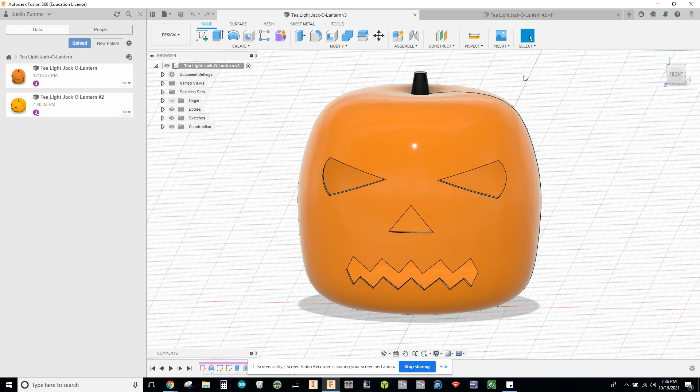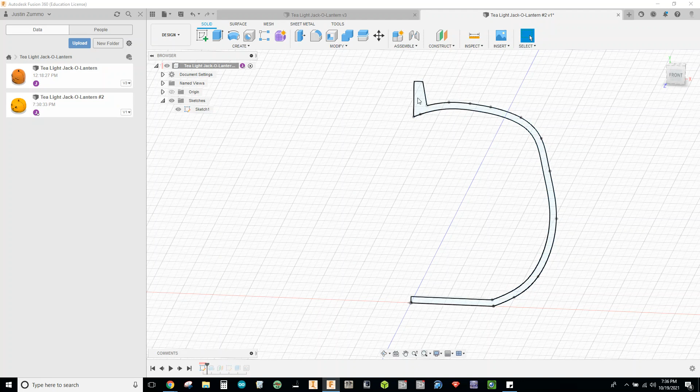So in order to get started, I wanted to review a couple different things about how we go about making this design. If I take this all the way back to the beginning, when we get started, I just make a sketch, and that sketch is the outside core of what is going to make up the shape for our jack-o'-lantern, for the pumpkin. Notice that the stem is incorporated into that as well.

I have a spline here that creates a really nice organic flow around the outside contour of the shape. Down here we have a flat portion, which will help us get a good print base when we send this to the 3D printer, and also provide a base for us to sit on top of the tea light. Eventually, towards the end, you'll see we make a hole in the bottom for the light to fit through. So this is the form, the shape, the sketch that we then revolve.

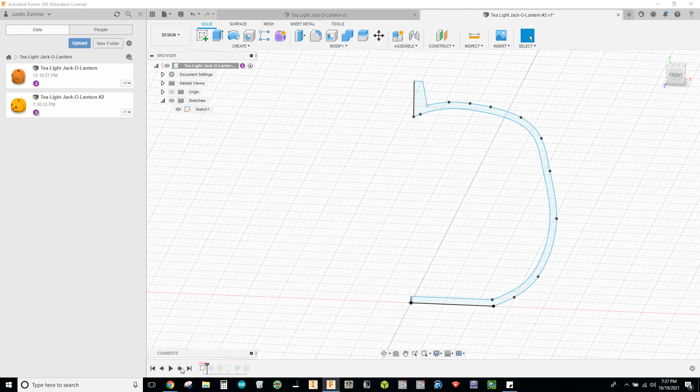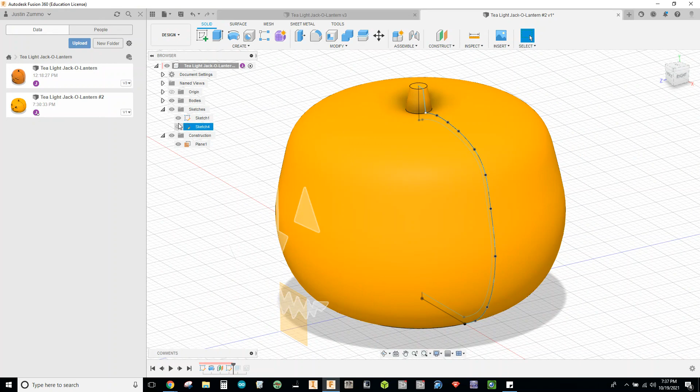So the next step was to revolve that 360 degrees to create our hollowed out shape. Next, I made a plane out in front of that area. If I rotate the pumpkin here, you can see I created a plane out in front. On that plane, I created another sketch, and that sketch incorporated the facial features.

I tried messing around with text and got a few different weird errors. With text, it's tricky too because you're not able to support some of the different cutouts, like for the letter D and B, unless you use a stencilized font. But for this jack-o'-lantern project, I'd advise going with some type of facial feature and staying away from the text options within sketch mode.

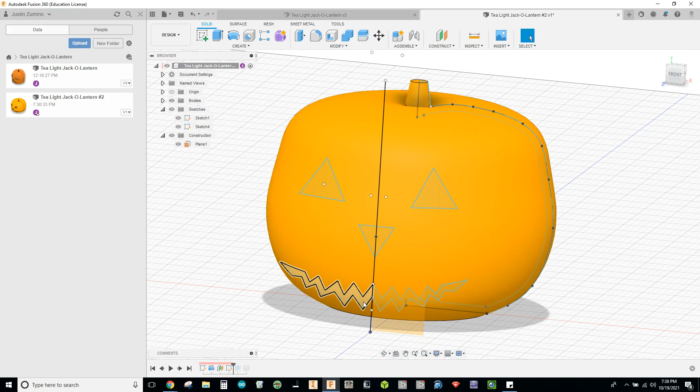Either way, here I made my facial features with the polygon tool and made a triangular eyeball, a nose, and using the line tool and arc tool, made the shape you see down here for the mouth. And then I have this line right down the center. If I square up on the front of the cube, I have this line down the center, and I actually mirrored over my left eye to the right, and the left side of the mouth to the right. The triangle I ended up placing on center with the line, so I just had that one from the get-go.

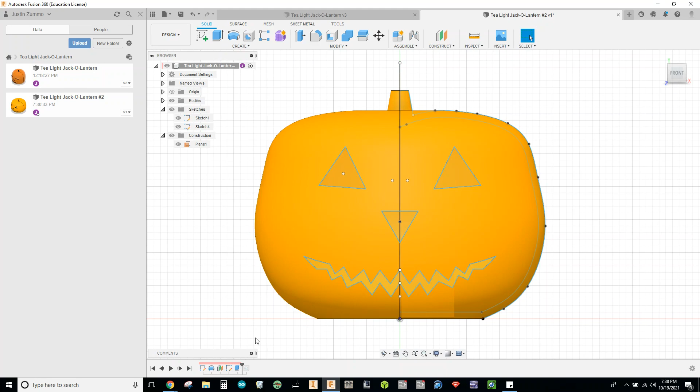After creating that sketch, I went ahead and extrude cut that backwards into the form, into the revolved hollowed out part, and you can see now how we have a very nice shell going on inside. After that, the last step was to use the hole feature that you see up here on the menu bar.

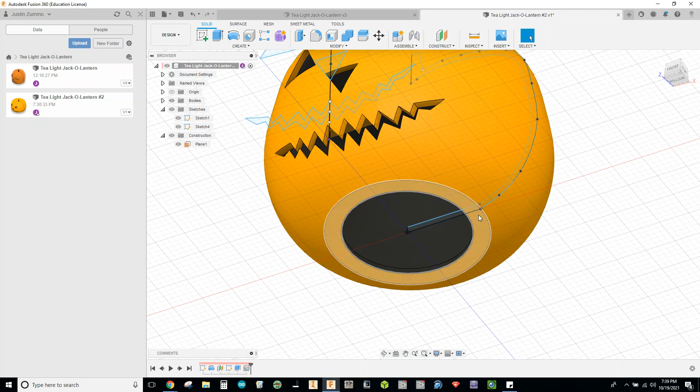The hole feature, if I rotate towards the bottom here, gave us a real nice cleared out opening. Again, we have this base here that'll help get nice adhesion to the print bed when we send this over to the 3D printer, and then a gap inside for the light to sit in and glow nicely through whatever face you put on the front of it.

So let me go ahead and start from the beginning. To get started, I'm going to go up here and select File and click New Design.

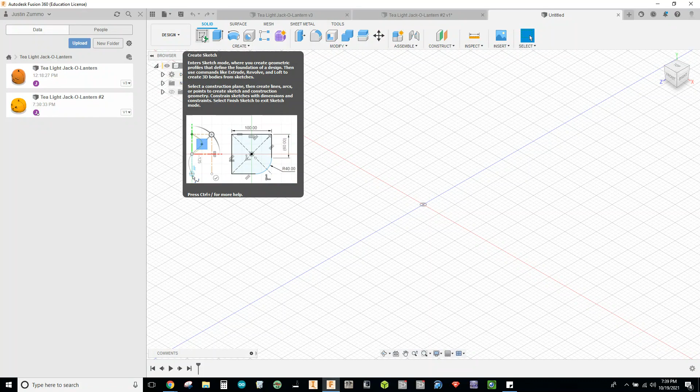First thing, I'm going to create a sketch on this back surface. For this sketch, there are only two dimensions I really want to make sure you all have be very specific: it's going to be this base dimension and the height dimension here.

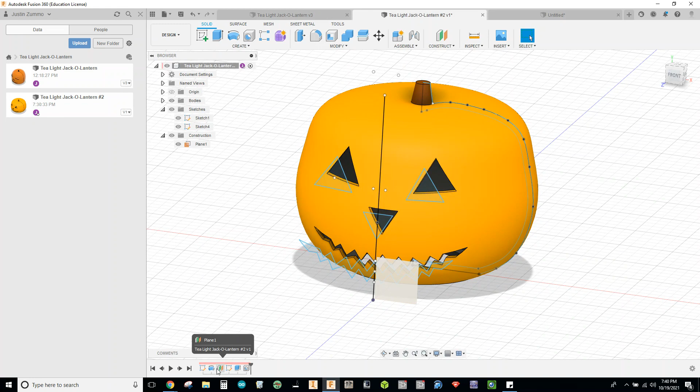If I click back over to my example I was showing you, sketch number 1, you can see the overall height we want to shoot for is around 1.5 inches. This base width is going to be 0.625. Another dimension worth noting here was the offset, which came in at 0.05.

And then the stem was really just drawn in organically, so no specific dimensions for the stem.

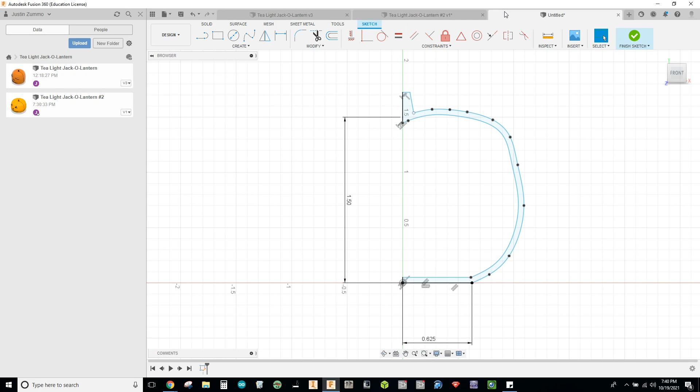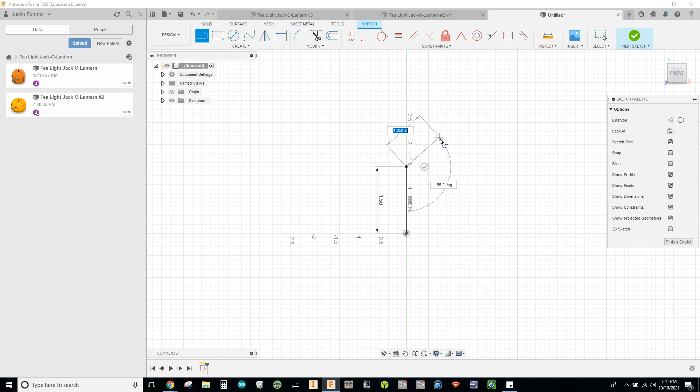Let's head back over, and I'm going to get the line tool. Always use the origin when beginning to construct a part. Click on the origin, go straight up from there, get the alignment going, and then type on the keyboard 1.5 inches. If I just click on my mouse to specify the next point, it'll allow me to keep drawing. But in fact, I'm actually going to go to the bottom and start again.

So I hit escape on my keyboard, grab the line tool, go back to the origin, click, drag out to the right this time, and type that number 0.625.

At this point, I'm just going to zoom in and grab this dimension tool, or the dimension itself, and drag it down out of the way.

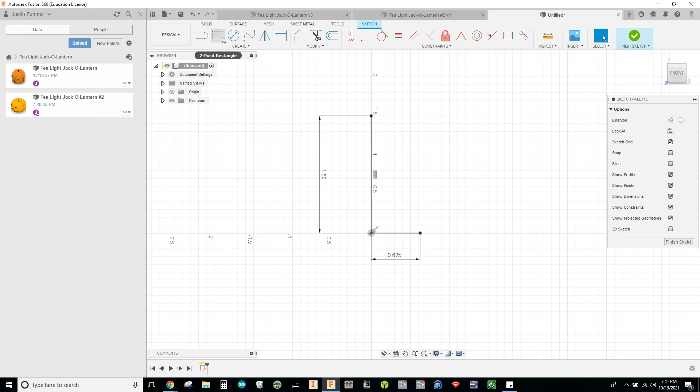Next, I'm going to grab my spline feature, and starting up here at the top, just gradually click and curve a really nice organic looking line. It's okay if you don't get it at first, but basically connect down to the bottom here, hit the green check mark to finish.

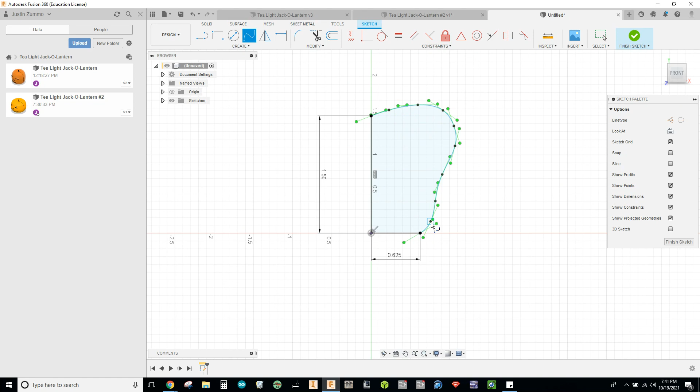And as I was saying, it's okay if you don't get it at first, because now we have the option to drag on these points and move them around and further finesse them into position. So feel free to have some fun with this and get really funky and bumpy if you need to, or if you like to.

Ultimately, I'm just going to go for a really nice curved outside shape. Something like this should be fine.

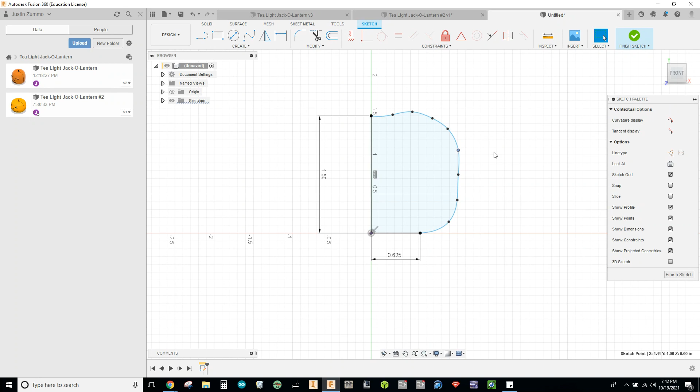Before we move on here, what I would like to do is an offset. Select this entire profile and give it a value of 0.05. That's going to give us a very nice hollowed out space inside of the jack-o'-lantern so that the light can glow, and also reduce the amount of plastic that we need to use to build our final product. So 0.05 for the offset.

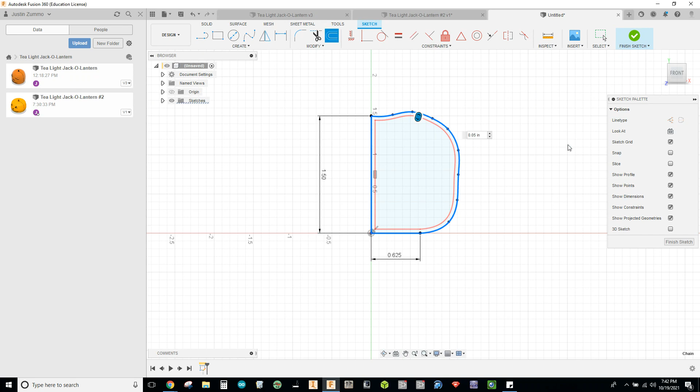Then I'm going to grab my line tool, and up here at the top, just clicking on this top point and extending it up another 0.2, 0.1, 0.3, it doesn't really matter. Kind of just fit this in as you see fit. Drag out to the side here, and then connect it back down to the shape, to the curvature, to that spline that we have going on.

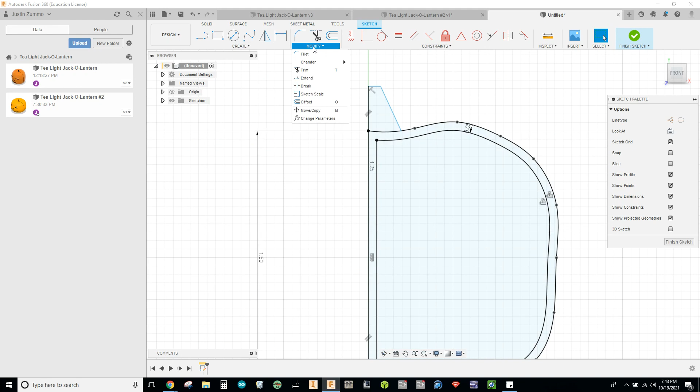To finish this off, we just have to clean this up a little bit. And what we want to do is grab our extend tool. I'm going to highlight this line and extend it out towards this center point, center line. Down at the bottom, do the same thing, extend this out to the left.

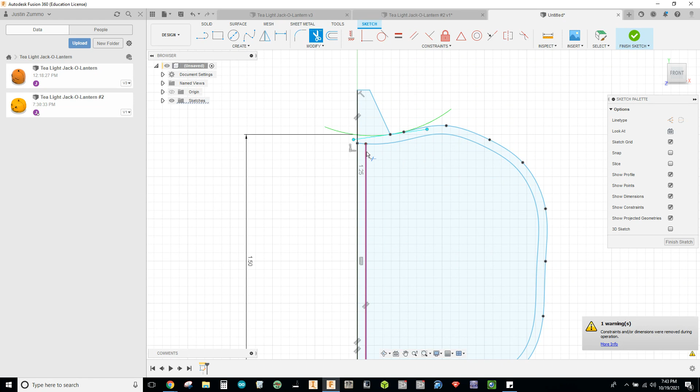Now I'm going to go back and use my trim tool here, and I want to cut out all of the interior portions of the line that I don't need anymore. So there, with 1, 2, 3 clicks, got rid of all my overlapping lines that I don't want. And I'm just left with one continuous path that will create the sketch for the revolution that we'll do next. So finish sketch from here.

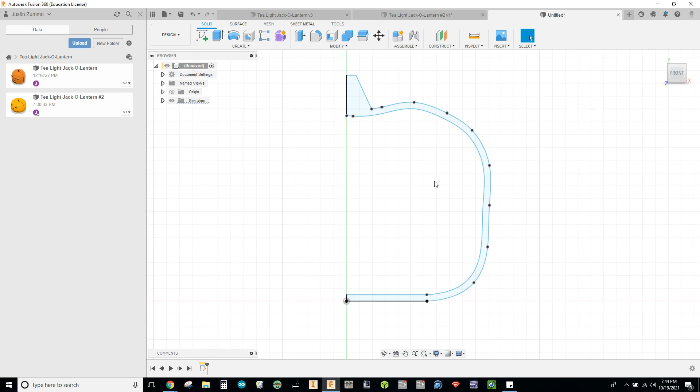Next, I'm going to go to revolve. It pre-selected it for me because it's the only sketch available right now. Later on, when you have multiple sketches, you will have to select it first. Then the next option is to select the axis in which you want to revolve around, so I'm just going to grab up here by the stem, this center line.

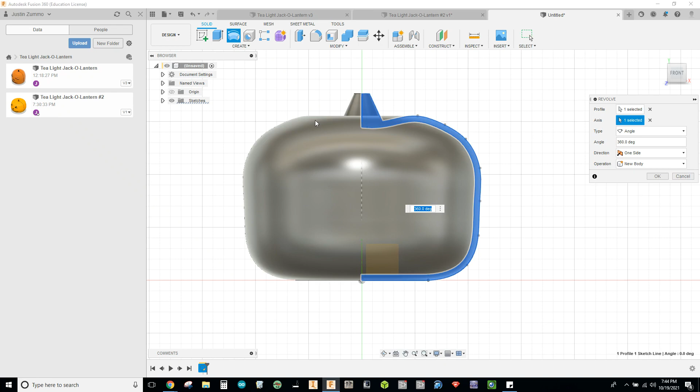You can see after selecting that, it goes ahead and creates the form for me. Just going to create an angled view here. And what's kind of neat is you can grab this node and drag it around and actually see what your part would look like at each one of these angled intervals.

And of course, what we want to do is go for a 360 full enclosure. Over here in options, you can see the angle value again, angle type, you can say degree or full. Direction: one-sided, two-sided, symmetrical. You can play with the values and how much you want to rotate it in each direction. You also have a couple of choices here: join, cut, intersect, new body, and new component. With this being the first solid model in the file, the default is new body.

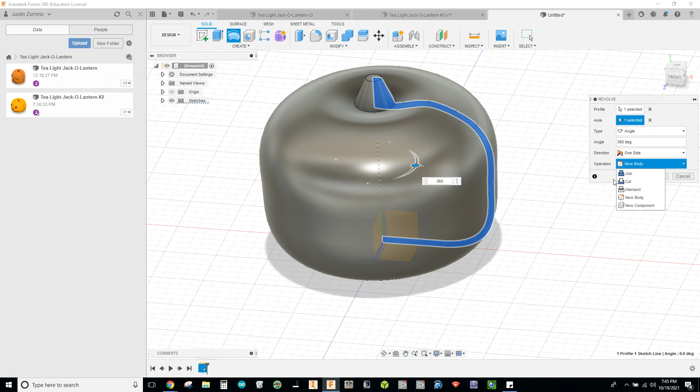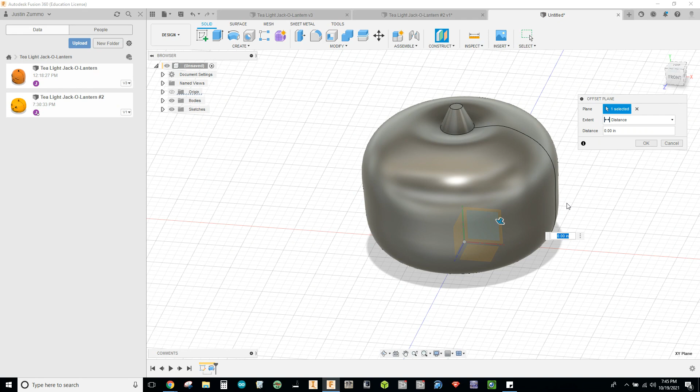Next, I want to create a plane out in front of one of our origin planes. I'm going to go to construct and select offset plane. Here you can see the 3 origin planes are highlighted. I'm going to select that back one, the same one we made our sketch on initially, and give it a distance of 1.25 inches away, just to get it out in front of the shape.

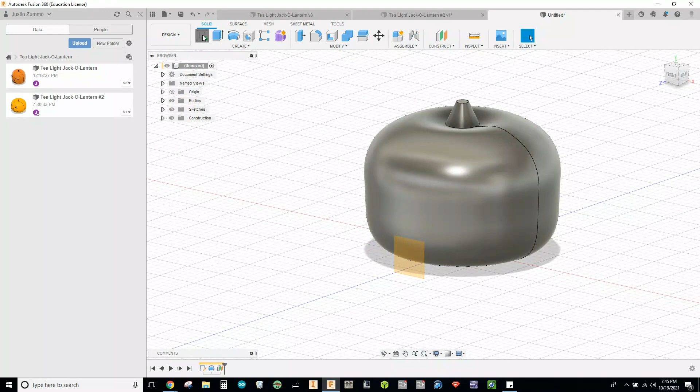If your curvature of your sketch ended up coming out further than 1.25, it's okay, just get the sketch plane out in front. Say okay, then create a sketch on that new plane. Here's where we're going to make our facial features.

I do like to use the mirror tool to get a nice symmetrical look. So I'm going to grab the line tool, click on the origin, and drag this up through the part - that's going to be my mirror line later on when I'm done with my sketch. Then you can play around with the line tool, rectangle, circle.

If you hold down create, you'll see arc, polygon - you can use this to make triangles. I'll show you that. Doesn't matter which one of these you use. I'm just going to grab the first one and click anywhere to get a decent position going.

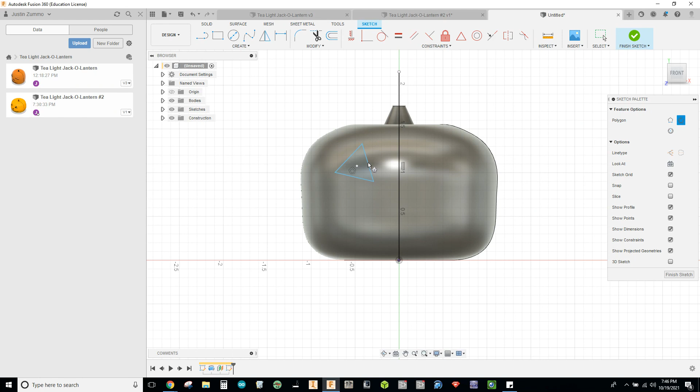As I drag out, you can enter in a dimension. If I hit tab on my keyboard, I can move over to specify how many sides I want within this polygon. So I'm going to give it 3 and just click randomly to create the shape that I want.

I'll do the same thing here with the polygon tool for a nose. I like a nice triangle nose on my jack-o'-lantern. I'm just going to drag up, get on the center line, so that's nice and centered.

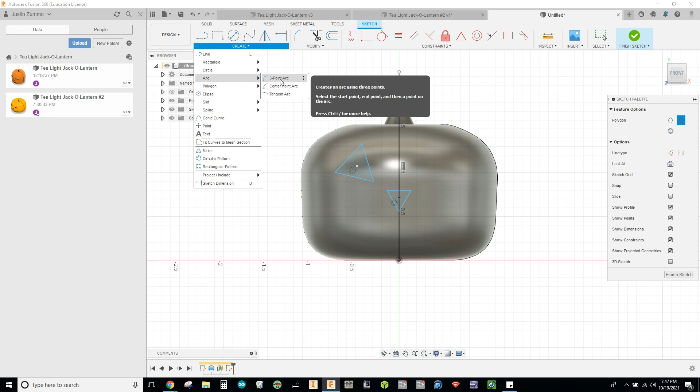To make my face, one option you can use is to start with an arc and go with a 3-point arc. You can click anywhere here on this middle line, anywhere out here to the left, and then you have a third click - that's why it's a 3-point arc. 1, 2, 3 points, 3 clicks, and create a curve.

And then do another one down here at the bottom to the center line. If you don't like how it comes in, you can always click and drag on these lines. That's the nice thing with Fusion - it allows for free form modeling, as we saw highlighted in one of the tutorial videos when we got started.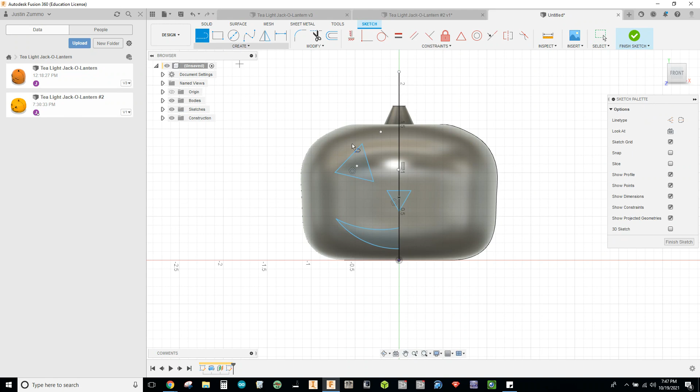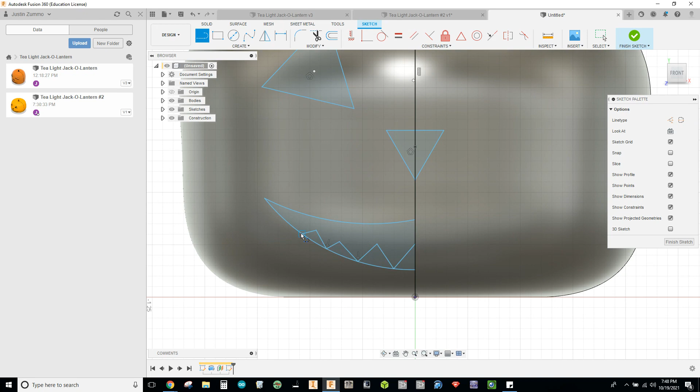From there, I'm going to use the line tool again and draw in some jagged looking teeth. I'll click anywhere here along my bottom curve, meet it here in the middle, and continue that kind of randomly all the way up the curve. Let's see how many I can fit in here.

And then just repeat that process here on the top. Again, there's no wrong way to do this type of work. There's no wrong way to carve a pumpkin either. So have fun with it as you go.

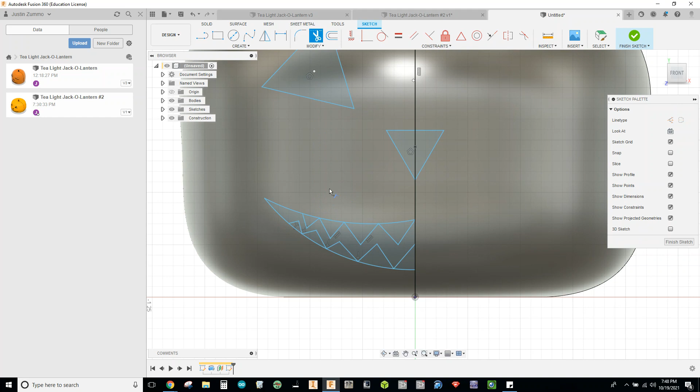Okay, and then what I'm going to do before I move on is just trim out the overlapping lines here, because all I really need here is that jagged pattern to cut into the face to create the mouth.

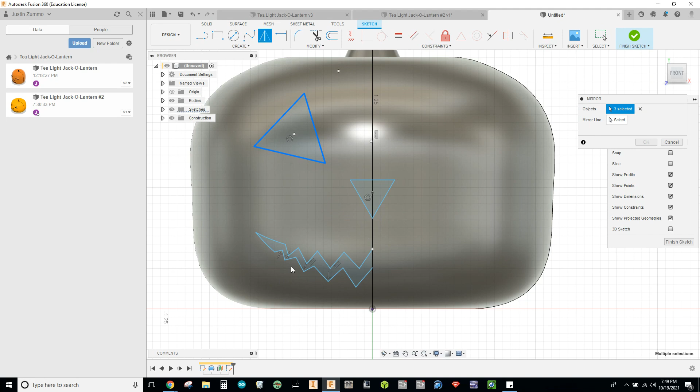And next, I'm going ahead and mirror. When I click on the mirror option, you can select different lines to add one at a time, or you can click and drag and select multiple lines at once. I ended up having 42 lines selected out of all that.

And then next, I just have to select my mirror line, the one we put on here first. You say okay, and you can see it flips over to the other side perfectly, all done for us, nice and symmetrical. Finish the sketch.

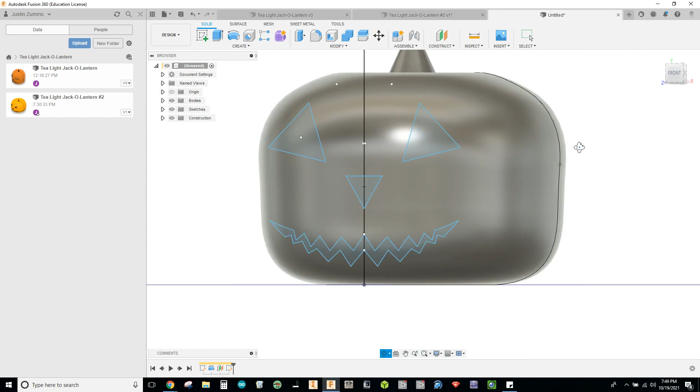Next, I'm going to extrude this in through the part. Select all of these enclosed shapes. And then for this, normally I would know a specific value that I wanted to use, but we're kind of making an organic shape and feature here, carving jack-o'-lanterns, same business.

So if I just grab this arrow, I can drag it in. You can actually see as it cuts into the part how it's going to make an impact. So if you want, you could even play it short and just make little cuts in and have big angles to it - that'd be kind of cool.

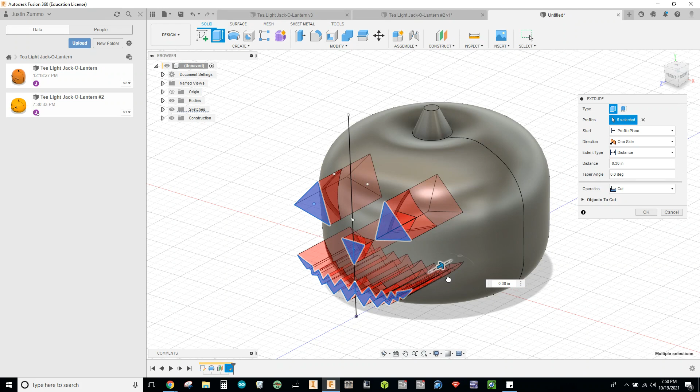Or you can go all the way through. At a certain point, once you reach the midpoint of this, you're not going to be making any more of an impact. I suppose you could blow it out the backside too, which would be interesting, a different way of using it. You know what, I actually haven't done one like that before. So I'm going to blow it all the way through and have that face on both sides. How about it?

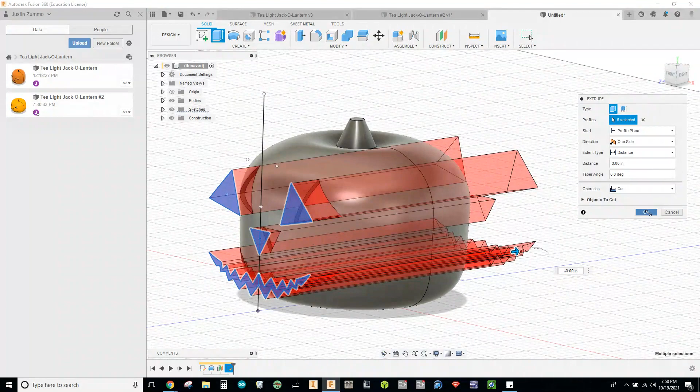Okay, now the last thing to do is add a hole and just have some fun with changing the appearances around.

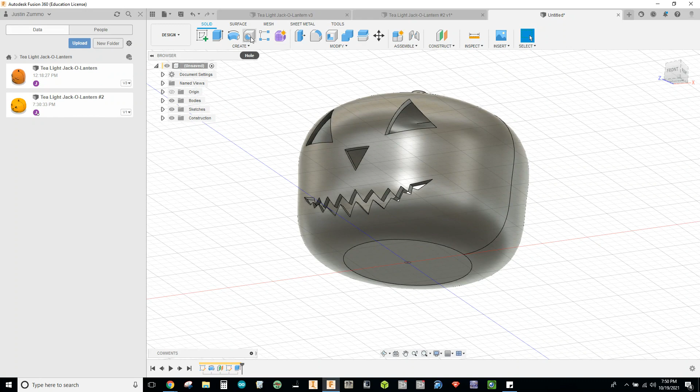I'm going to go ahead and select the hole feature. I could make a sketch, put a circle on it, extrude, and cut that away, but that's kind of the cheap way of going about doing that type of feature. So if you have a special feature for making a hole, why not use it? I have this hole feature here.

I'm just going to rotate towards the bottom and start by selecting the face that I want to make the hole on, which would be this bottom surface. Next, I have to establish the concentric reference.

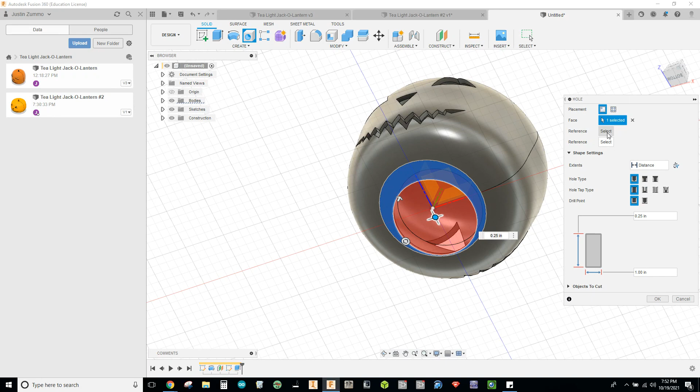Then you can see there's a slew of options here for different hole types: countersink, counter bore, different ways of tapping the hole, adding threads to it. But if you want a flat bottom hole or an angled hole, I'm just going to go simple and flat with this. For the cut distance of the hole, really just need to go through the bottom base of it.

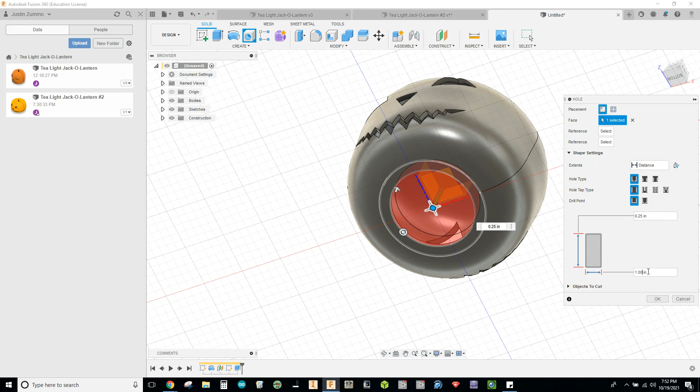A quarter inch will do just that. For the diameter of it, we're going to set it to 1 inch. Say OK. Now you have the hole in the base.

Now we're starting to see how this is looking like a jack-o'-lantern. The light will fit inside of there and glow through our openings. Last thing is to have some fun here with appearances.

If you go to the appearance panel, which I have here on the sidebar, and you type in the color brown or orange, what you're going to notice is I really don't have a nice brown here. What you're seeing is something that I created as my own material because brown wasn't in my library as a default, so I added it as a favorite.

I'll go and show you how to do this next. The only two browns that were in the program were light brown and weathered, which really isn't dark enough for like a stem feature. Just a quick point of reference, if you search orange, there's no orange in here at all. This was one that I had to create and add as well.

So in order to make your own appearances, if there are none—which is just a coincidence, because there's a lot of other colors in the program ready for us to use, and I'll show you a few of them in a second—but orange and brown, the two that we need for this project, are not in there as a default, very odd.

So go down here underneath Modify and select Manage Materials. Then down here, you'll see a little sphere with a plus symbol. That's to create a new material.

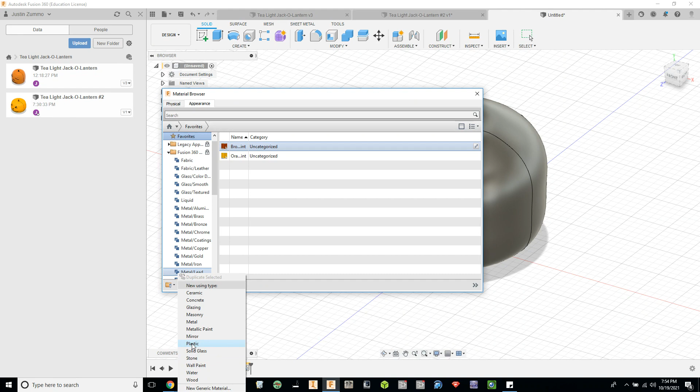There's a bunch of different options here that you can use. I usually just go for plastic or wall paint, just simple finishes and looks. But you can have some fun with all these different options as well. I'm just going to go with plastic because I made a wall paint earlier, and I might as well make a different one. So I'll select plastic this time and just change the name—instead of default plastic, call it orange.

You can select solid, transparent, or vinyl. I'm just going to leave it as solid. Then here for color, you can either do this the old-fashioned way and just kind of randomize the color and get something close to what you think you want.

But you'll notice there are specific values down here as you move this around. These are called the RGB values, and this is something you can look up. These three sets of three digits are specific to every single color that's available. There's also a short code—they call it HTML or a hex code—that you can type in for these specific colors. So for orange, I'll pull up a different tab here real quick.

For orange, if you type in 'orange RGB value'—and of course there are different types of oranges, but if you just go for a standardized approach—this is the three different values you could type in for RGB, or you could just take this code and bring that in down here.

Paste that in. This is the most standardized color for orange. I'll say OK, finish. A couple options for that: polish, glossy, or matte.

Different things here you can play around with, texturizing it, creating patterns in it, and tinting it in different ways. A whole bunch of different options that you can mess with here.

I'm just going to go ahead and say apply and add that as a favorite. Now I will have that across all of the files that I create from here on out, which is a really nice feature. We had something similar in Autodesk Inventor, but it was within the one document or file that you created the color. So essentially, every time you needed that specific material color, you had to create it again within that file. This is nice that it will transcend through all the rest of the files that you create.

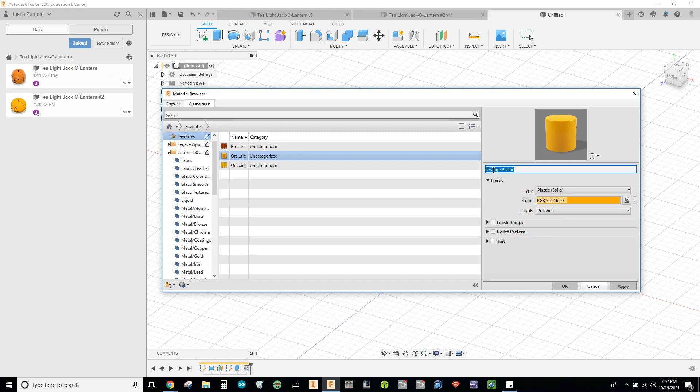Moving on, I'm going to go ahead and create a brown while I'm here. Do brown plastic, change the color over to brown. I have the RGB value here for that and the HTML code or the hex code. I'm going to add this down below. Once you have the color selected, say apply, and we should have two different colors that we can use now on the model.

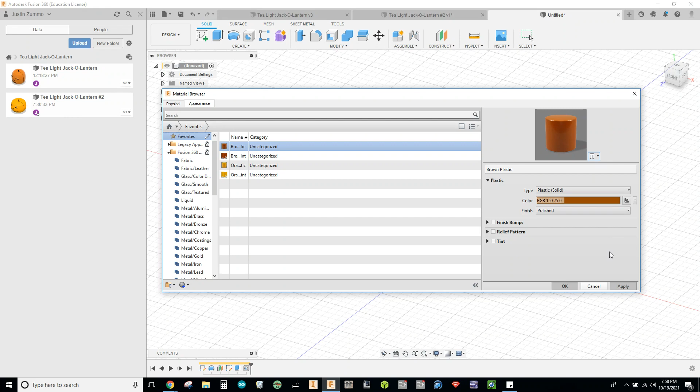So I'm going to close this window, go back to modify here, pull up appearance, and then you can search for it by keyword. You can look through all the different folders that are here within the Fusion 360 Appearances library.

Later on, we can get into adding ones to your appearances here, but for now, I have these favorites that I just created on the other menu, and you can either add them to the design or simply drag them right out here into the space and apply them. There's two different ways to do that.

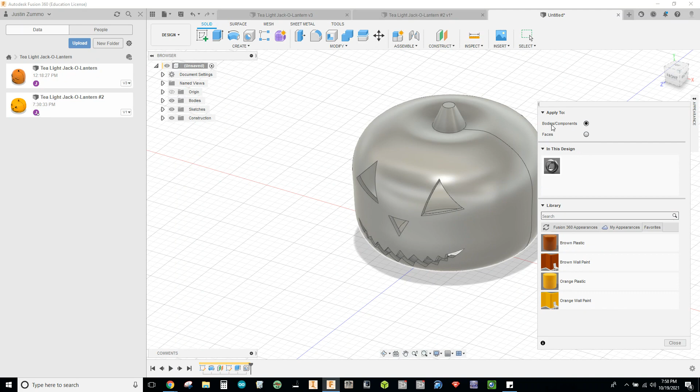You can do the whole body or you can do specific faces. So for the whole body, I would want to grab this orange color and make the whole thing orange, and then switch this over to faces, grab brown, and just do the stem part there and the cap of it. And then I do want to use black because it'll really help this whole thing stand out on screen.

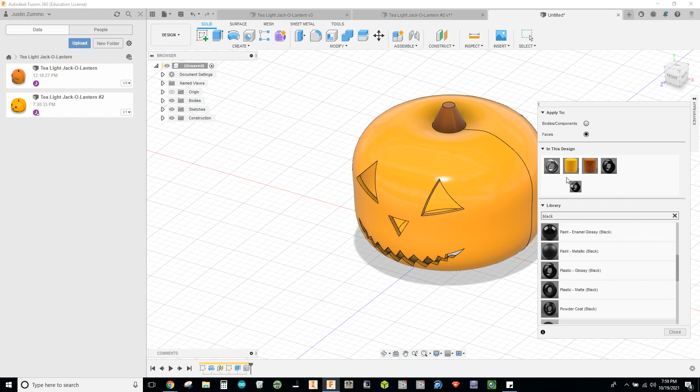So I'm going to search for black, and you'll see there's lots of different black colors in here. There's a nice plastic glossy one that I will add to the design here, and then drag inside the shell. There's a couple other surfaces I can add to that, and it's really going to help it pop on screen.

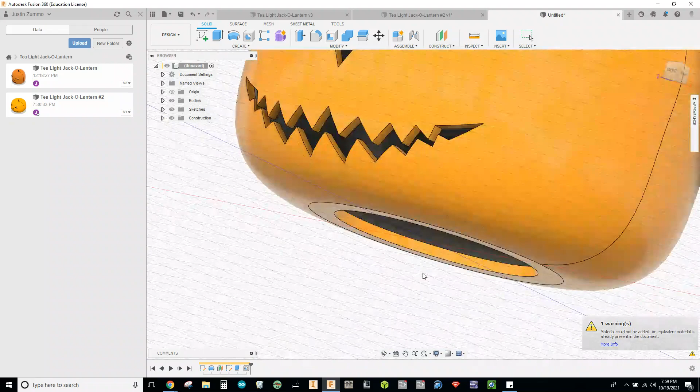Sometimes you have trouble getting the right selection, but it's just based on your position and your rotation. So if you kind of maneuver it around and try again, eventually you can get it to highlight for you just like that. And then I'll do one down inside the face.

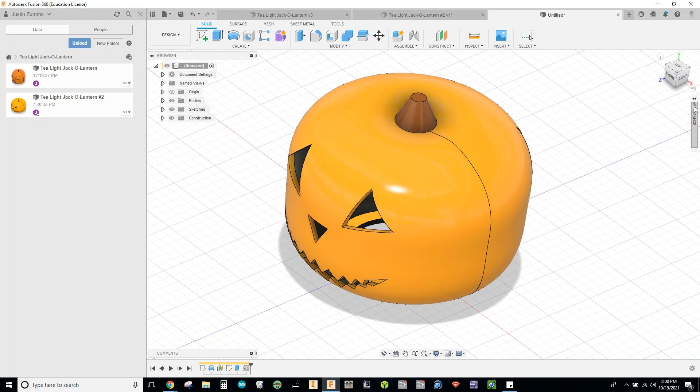See, another example of how I just can't get it based on how I'm looking at it. So if I move this right through the eyeball, there we go. All right, and you can do it to all the surfaces here within the face too if you really want to take the time, and that does also help add to making it stand out.

But here's our finished product, looking pretty sweet. We can screenshot this, we can upload this to different websites and embed it onto our portfolios later on. But this will be a quick little project for us for the week of Halloween coming up.